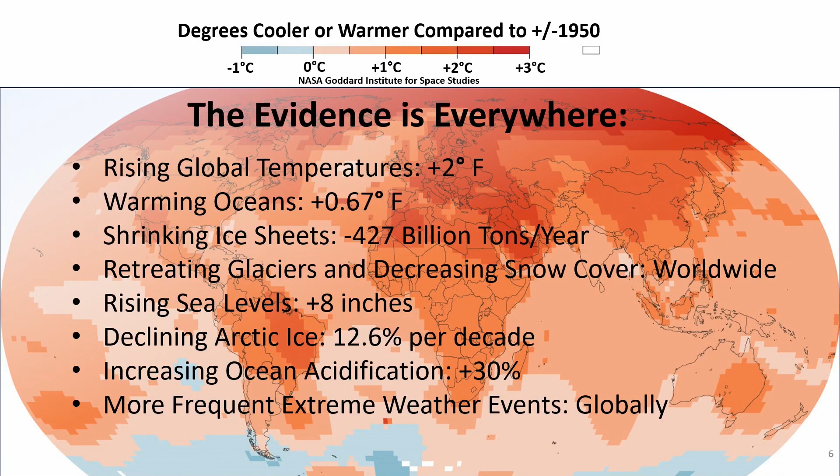So climate change really is slowly killing all life on the planet. It just keeps getting worse and worse. And evidence is really everywhere. You can read the list, and you've seen evidence of this before. Some people think it's just part of a natural cycle, but if you look at CO2 emissions through the history of time, it's exponentially increasing to a level we've never, ever been able to even not only not document, but conceive of ever happening. So, as I said before, we're both the answer and the problem.

But there is a solution. It is, at least to part of it, sustainable buildings. And there's some global plans on how we can get climate change to be reversed. But a lot of us don't really understand what to do about it. And hopefully that's where I can help. So, as Diane said, I've got a whole bunch of years of experience, and it all comes with time, and luckily without too many errors.

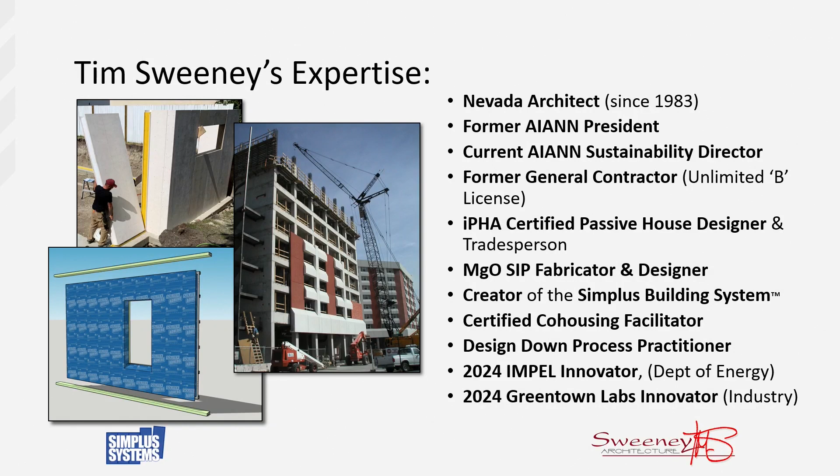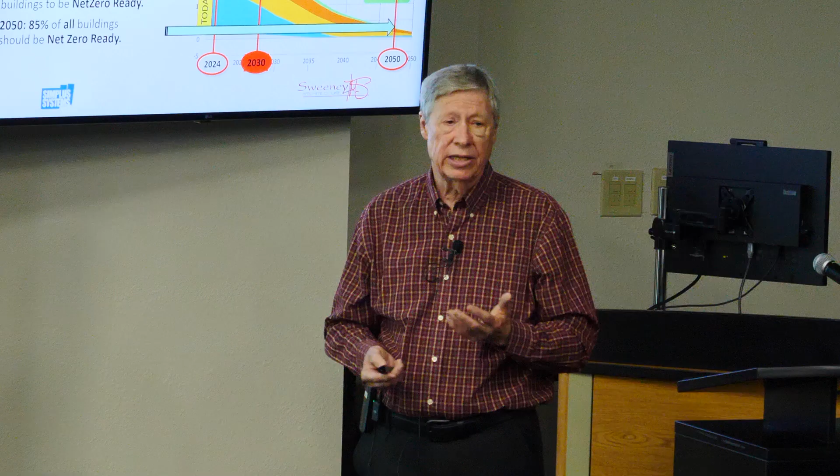But we're not going to make this deadline, and hopefully we will get it down with enough understanding and effort by everybody who's involved.

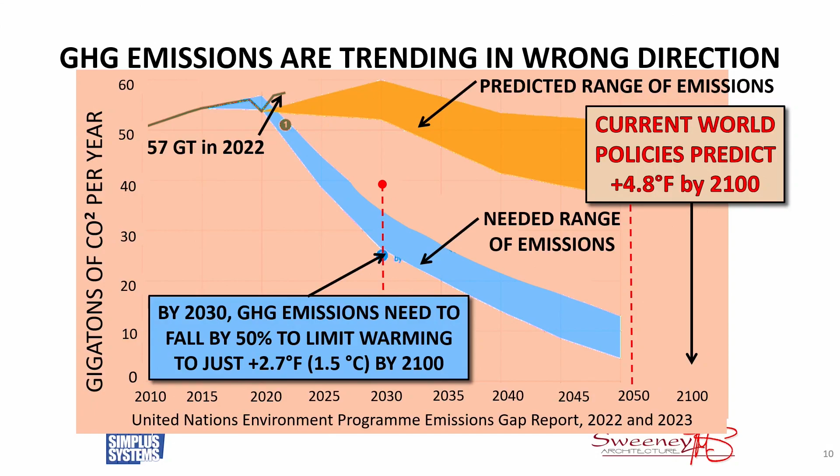To make matters worse, the population is increasing. It's astounding to me how much growth is going to be happening, an equivalence of entire New York City every 34 days for the next 40 years. That's just bizarre, but that is what's happening around the world. And it needs to be done sustainably, of course. We've got to stop this greenhouse gas problem.

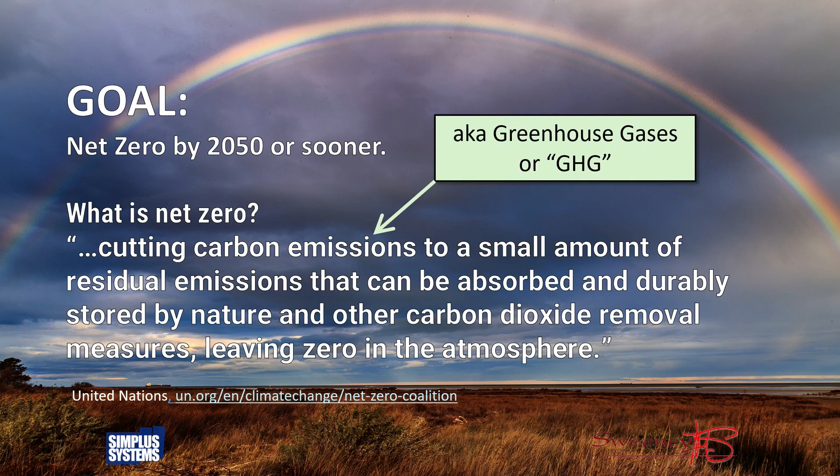So net zero, what does it mean? Well, it's basically cutting carbon emissions, which is caused by burning of fossil fuels, which is in essence greenhouse gases, cutting it down to a level where the planet can naturally absorb it and deal with it. So net zero just means getting to where we're sustainable. And we've got a long ways to go, unfortunately.

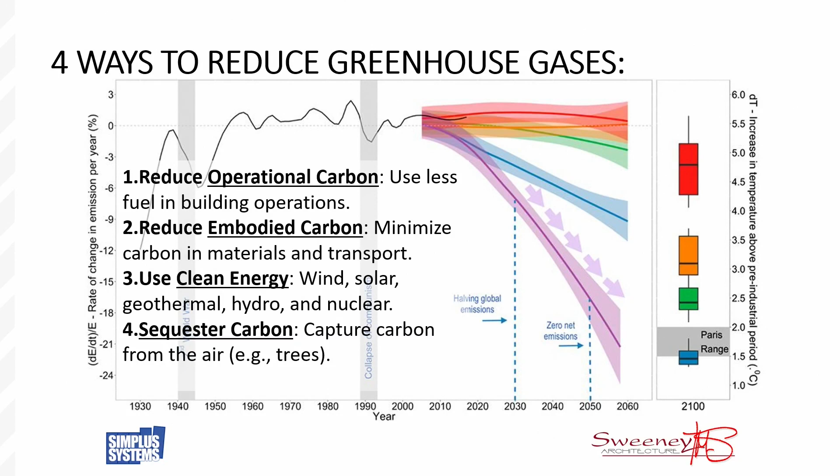But there's 4 major ways we can reduce the greenhouse gases. Operational carbon, the fuel we burn to heat and cool and run and power and light our buildings. We can cut down on that. We can reduce the embodied carbon, that fuel that's used to make buildings and make the materials and to transport the materials to the job site. Definitely there's some good movement towards clean energy and solar and such. And sequestering, capturing the carbon that's already out there and that is being produced, that's a good reason not to cut down trees and make lumber. So there are ways to redo it.

And the problem is that 39% of all the greenhouse gases are by building operations and building construction.

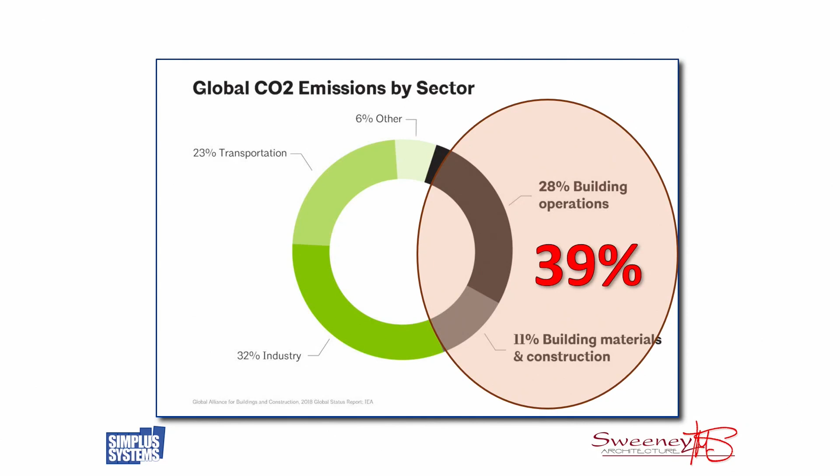Meanwhile, the codes are not adequate. They don't really get buildings built that are of a nature that limits fuel usage, both from construction and from operation.

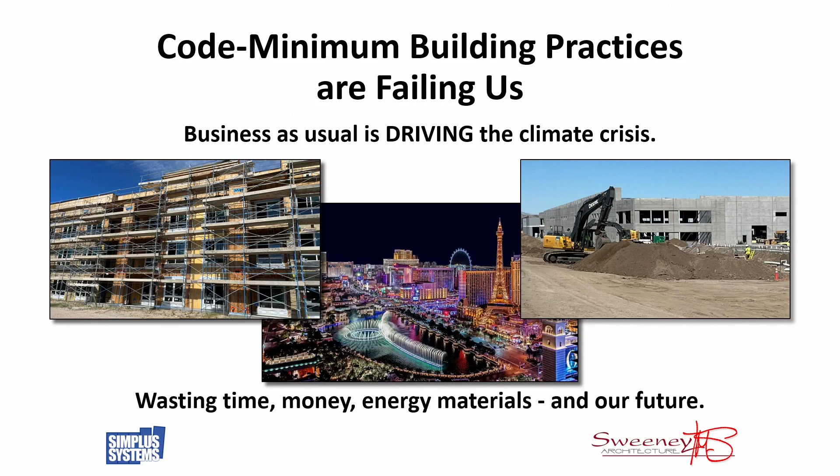These are a couple of projects that have been completed recently in the Reno area. Tilt-up buildings use a lot of energy just to make concrete and steel. Wood without a lot of insulation is a problem. And of course, any casino down in Las Vegas is going to burn as much energy as they can to get in the paying customer.

So we've got to stop all of this waste. Now, if we didn't have leaky buildings, that would be half of the battle right there. But buildings do leak—they leak air, they leak energy. It's likely because they don't have air barriers adequate to stop moisture and air from migrating, and they don't have enough insulation to keep us from having to burn more fuel.

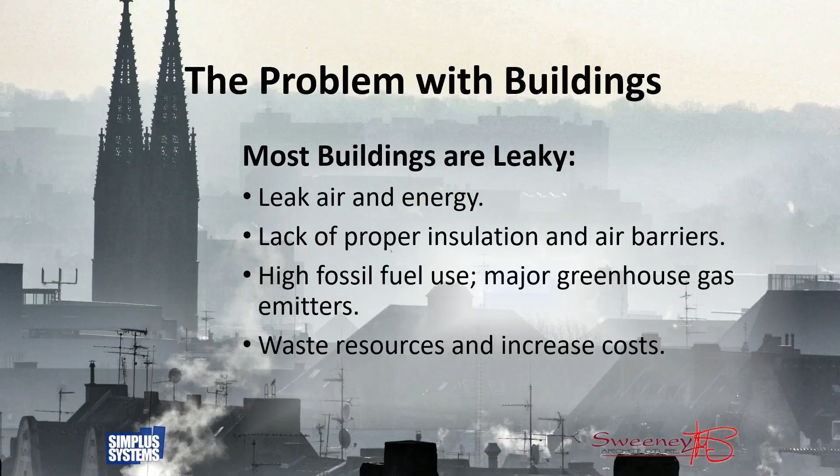As an example, one electrical outlet on an exterior wall can leak up to 55 gallons of water vapor per heating season—just one outlet.

Now, if that moisture—and in Nevada it's dry outside typically and more humid inside—if that pressure drive causes that moisture to get to a point where it can't evaporate, if the building's not leaky, well then that moisture can collect and cause condensation, mold, deterioration, a lot of repair work expenses, and health problems. So you need to have an air barrier basically on the inside of the building to stop that moisture from getting out.

But then there's more to it that I'll explain about ventilation.

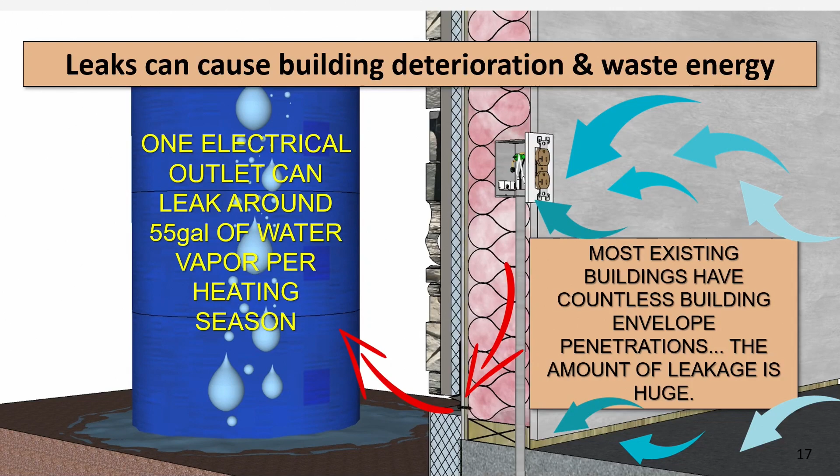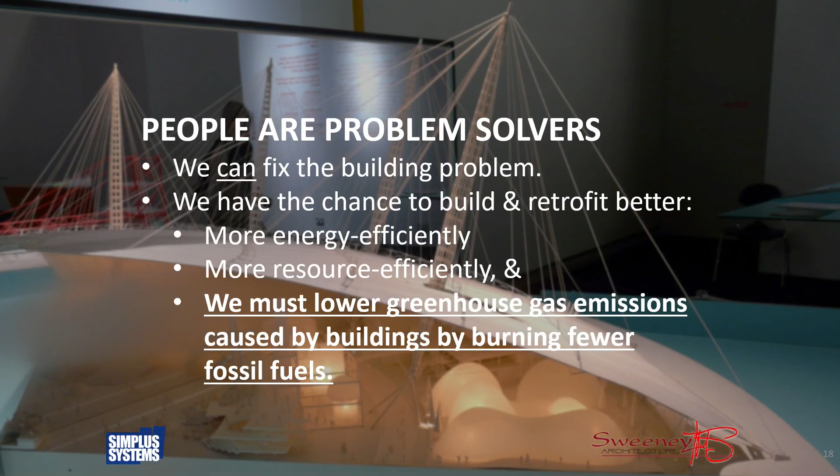Thankfully, people are problem solvers. We've had a lot of problems we've all had to face, and we're pretty good at rising to the challenge, especially when it's our own dollars, our own lives, and our own futures at stake. So we can tackle this problem if we really put our minds to it. But it's all, again, about lowering the amount of fossil fuels that we burn.

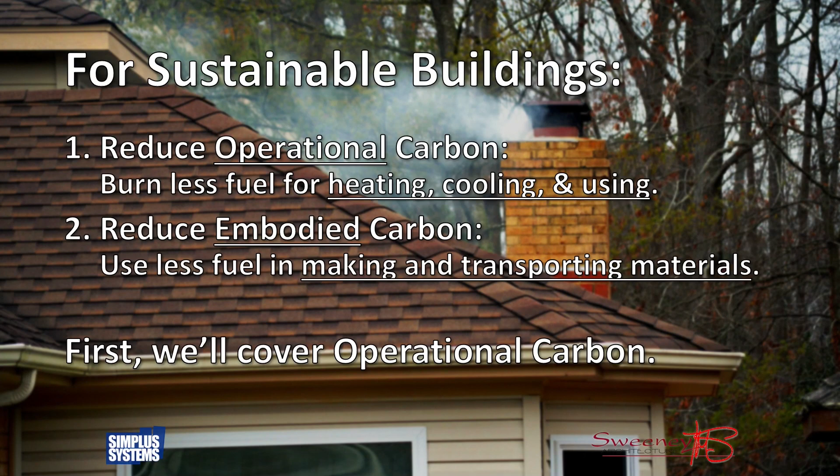So let's talk about how buildings can be made better. Basically it's two ways: reducing the operational carbon—burning less fuel operating them—and reducing the embodied carbon—using less fuel making and transporting the materials. We'll start with the operational carbon first. Remember these numbers, 1 and 2, because that's really the basis of everything.

So the best way to make the most energy efficient buildings is with a way of designing called passive house design. I'll explain how that name is a little confusing. But basically, you have the best way of designing that we're going to be coupling with the best way of building. That's the 1-2 punch we're going to be talking about.

Passive house is a German word that means inactive, passive, and it also means building—so inactive building relating to the mechanical systems.

This coffee thermos is a perfect example of something that's passive. You build it once, it does its job, and you can keep using it over and over, as opposed to having to keep pouring more energy into something.

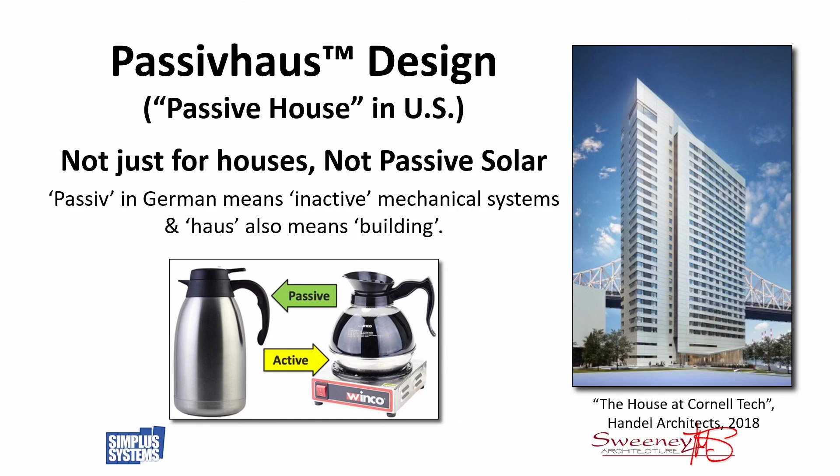This is actually a 26-story passive house dormitory that was completed in 2018. Not one of my projects—I wish it was—but it's an example showing you can do more than just houses.

Here's a little story about what passive house is: passive house explained in 90 seconds.

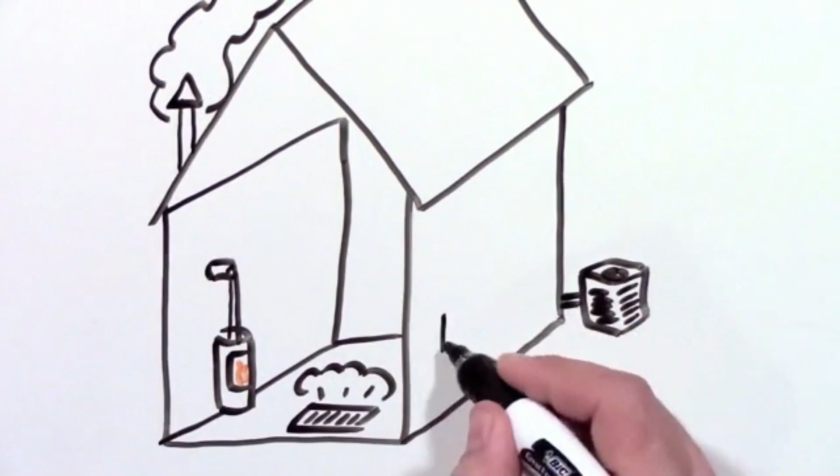Does your house have a heater in the basement, or maybe a fireplace? Probably also a central air conditioner, or maybe a window unit. Did you ever wonder if it was necessary? In 1991, a physicist in Germany, Dr. Feist, built the first passive house. Here's what he did.

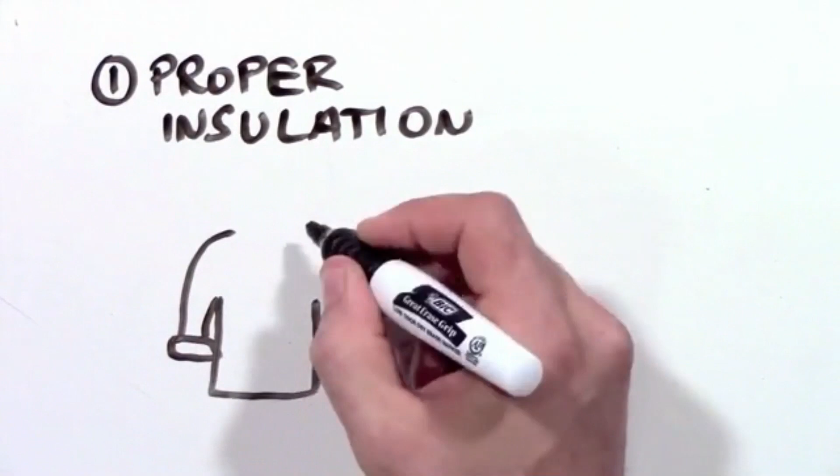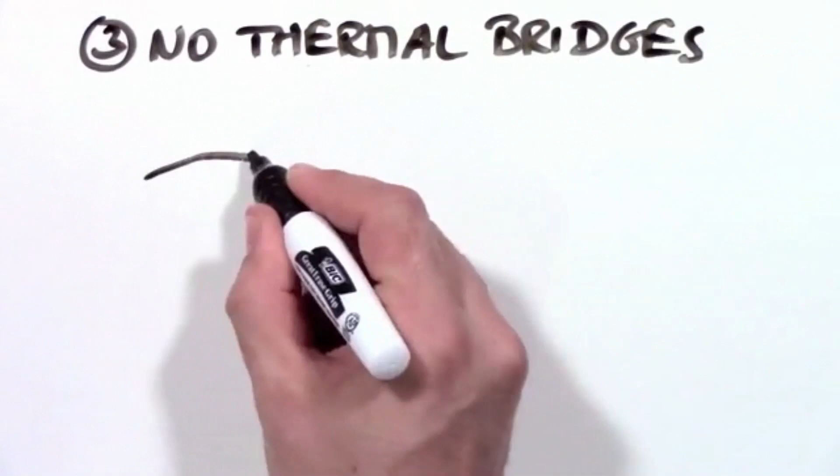One: proper insulation—it's just like wearing the right winter jacket, it also doesn't need a heater. Two: no air leakages—there should be no holes, small or large, to let hot air out of the house. Three: no thermal bridges—a thermal bridge is like a road for heating energy in which warmth can travel right through your walls. As a matter of fact, most of our houses have thermal highways in our walls where heat can easily travel to the outside.

Plus, the house needs proper windows, most of the time with triple pane glass. It needs to be oriented properly so the sun can heat it in the winter and shade is provided in the summer. And it uses an HRV, a device that provides the inside with fresh air without letting the heat out.

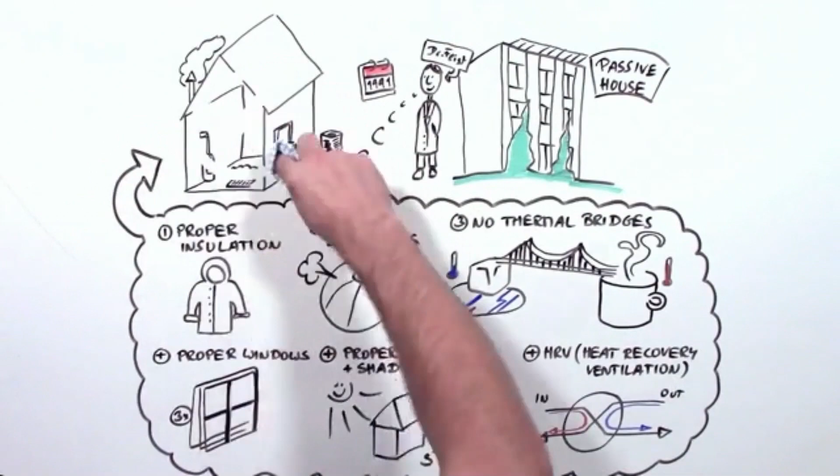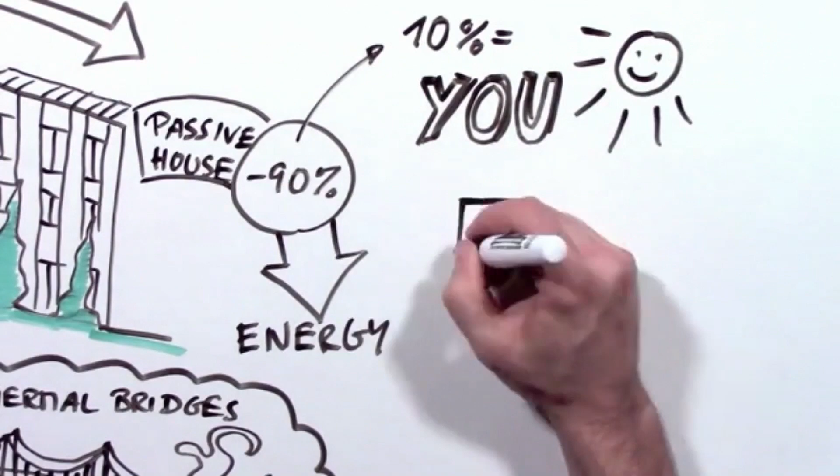Add all these things up, and it turns out your house doesn't need a heater or air conditioner. So where does the heat come from? A passive house needs 90% less energy, and that can easily be supplied by your body heat, the sun, your appliances, light bulbs, and even your TV. This saves you a lot of money on your heating bill and helps preserve the environment. Did we make it in 90 seconds? You bet we did. Very good.

So that talked about windows being triple pane. In this area, double pane is often adequate. And it's, as I said before, not just for houses.

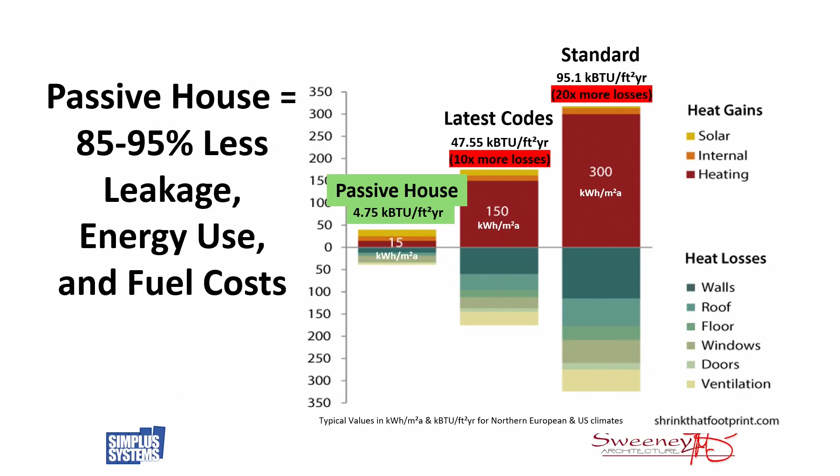To prove the energy savings, the column right here of energy used per year, 4.7 thousand BTUs per square foot per year, is really minor compared to the way that homes are being built nowadays, or even existing, with 20 times more energy consumed, or the latest codes with 10 times more energy. So you're looking at 85 to 95% less leakage, energy use, fuel costs, and pollution just by using proper design.

It also makes more comfortable, healthy, enjoyable spaces. Besides all the fuel savings, there's less maintenance and longer lasting materials. The more you go towards the right on this scale, the closer you get to net zero, to truly energy efficient building, and getting away from how we're building today. Greater energy savings, more comfort, healthier environment.

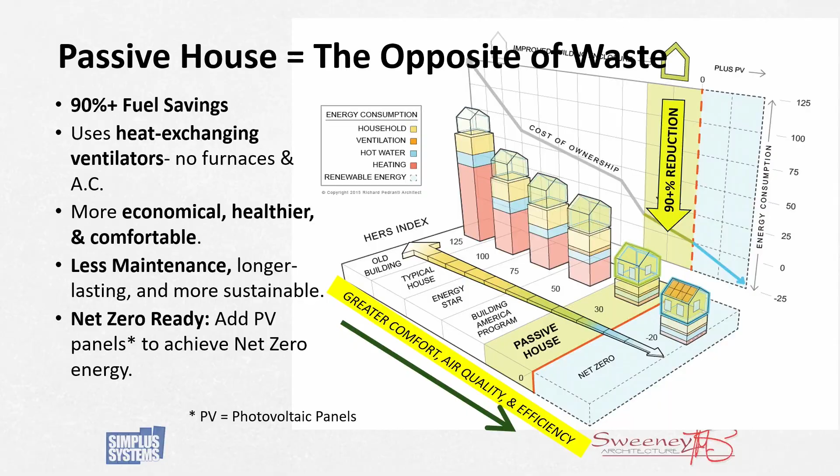Yeah, it's going to cost a little bit more, but without any other considerations, it's worth it, because you're going to get that money back plus, and there's ways to even save money with the construction systems I'll tell you about. So, reducing embodied carbon, the material or energy used to make materials, build buildings, and transport things.

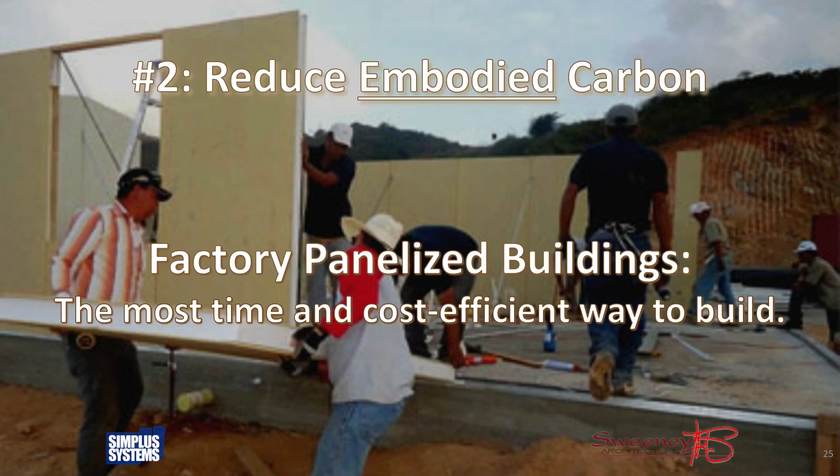RS Means is the US's largest, most well-respected estimating service. They publish estimating guides for contractors, architects, and engineers. They did a side-by-side test of a 2-story stick-built 2x6 home compared to an OSB, oriented strand board, panelized house, and found the panelized house was 55% faster to put up and took 41% less labor.

Now that all translates to cost, and it's easier with less callback if you're a contractor. That's very important.

There's lots of different ways of panelizing though, and I'm going to run through these so that you know your options and can make your own informed decisions. So we're talking about, first of all, what's called wood open wall.

It's basically stick framing done in the factory, making panels sized to fit onto trucks, then set into the field. You save a lot of time in the field on the framing, but you still have to insulate it, still have to sheetrock the inside, and it's still stick framing, still subject to fire, mold, and other problems.

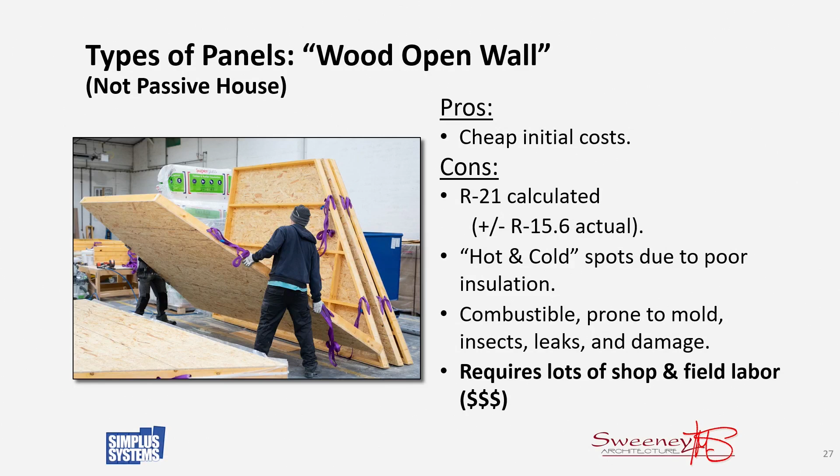Typically it's done with fiberglass insulation, which often sags and causes gaps in the insulation. Every time you have a wood stud, you have a thermal bridge, a place with lesser thermal resistance than the rest of the wall. So even though you may say it's an R21 wall, it actually often performs only R15, and you can have hot and cold spots. Basically, it's better than stick framing in the field, but it's still stick framing.

There's another version of panelized stick framing by the company Certainteed. They supply a lot of different building materials, and they have what they call their OPA, or One Precision Assemblies. That comes with the siding and the windows, and this one actually has insulation in place. They leave off the drywall so you can run the electrical and then put in the drywall inside, but it's still stick framing.

It still has the same problems that any wood project does, and there's a lot of shop labor that goes into it, so it's not an inexpensive solution, and the thermal resistance is really not all that great.

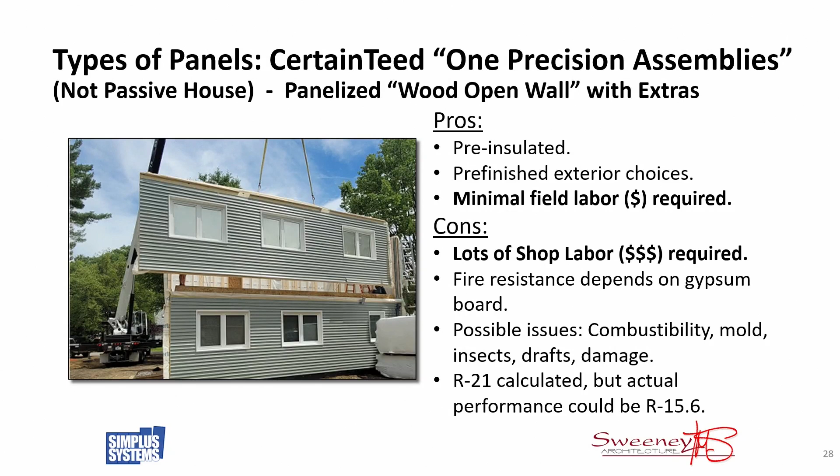Now here's where we start getting into true panels. This is the OSB panel I was talking about before, which RS Means used in their evaluation compared to stick framing. It's definitely a more energy efficient way of building, because there's basically uninterrupted insulation along the width of the panel, with just what are called splines, doubled up studs, happening every 4 feet on center.

So you save a whole lot of thermal bridges, and it's done in a factory, so there's little shop labor, and it goes up fast in the field, so there's little field labor, so you save a lot of money there. The cost is going to be more than stick framing on a material basis, but you save a whole lot in time and effort, and often it's actually less expensive than stick framing.

You do have to use drywall to finish off the inside of it because it is wood, unless you like the wood and you don't need a fire-rated interior, then you can live with OSB if you choose to.

The other kind of SIP, or structural insulated panel, is MgO. MgO is a chemical name for magnesium oxide. This is a sheet of it right here. It's just cement board, made from magnesite ore. The cement most people think of is Portland cement, which is made by burning limestone. So this is just a different kind of cement board.

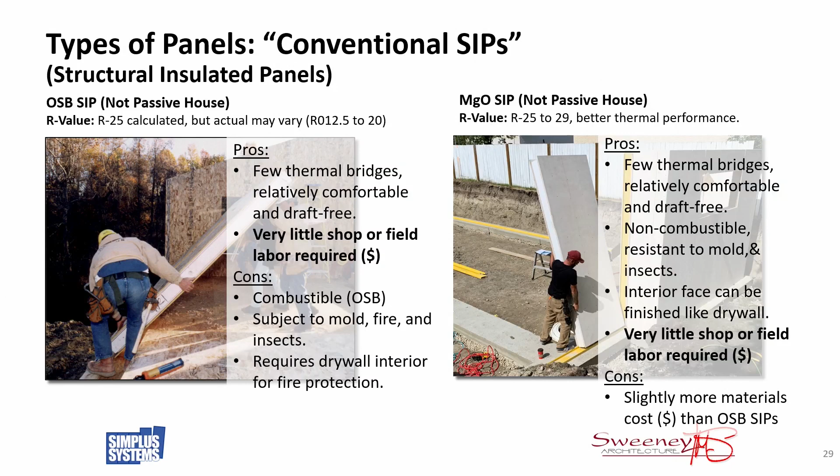It's so affordable that you can pay for those passive house increased costs and still end up with an overall less expensive building that is healthier, performs better, is more sustainable—exactly where we're trying to get to.

This is a little bit more information on structural insulated panels. You'll see it's a sandwich of insulation, often expanded polystyrene or styrofoam, and the cement boards, and then there's different kinds of splines that you can use.

Metal has been used quite a lot. I don't agree with that approach because it's a thermal bridge. That means you need to put additional insulation over the exterior to stop the temperature from reaching that metal.

Or you can use synthetics such as fiberglass. That's really the best way to go because the thermal expansion coefficient of fiberglass is the same as the MgO board. Or you can use wood.

You better use dry wood that doesn't shrink on you. Or you can use what are called block splines or surface splines, which are kind of like what they call biscuits in cabinet work. But again, MgO is non-combustible, antifungal, fire resistant, water resistant, non-toxic, and that's an example of what happens—it just gets a smudge.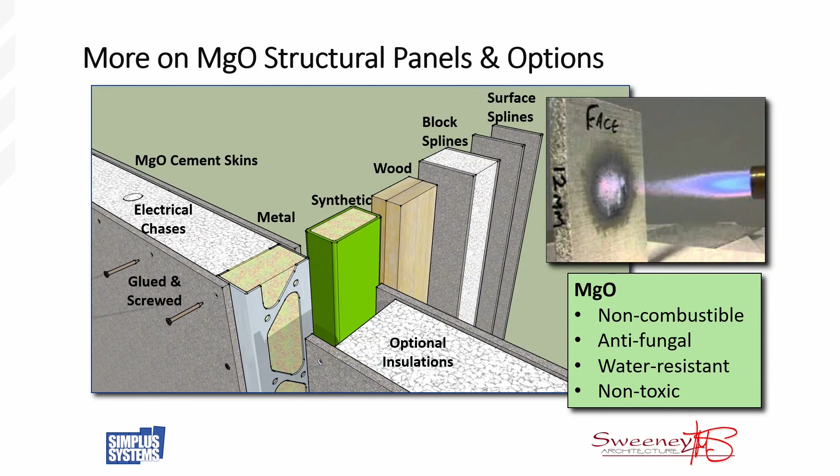This is a mini sample of that same kind of thing. It just has a skinnier piece of insulation in here to allow people to more easily handle it in demonstrations such as this.

And one of them in Florida even survived Hurricane Irma with just a couple of windows that blew out—they weren't fastened correctly. So even though other buildings in the area had lots of structural damage, the Florida building didn't.

And if you're doing what's called prevailing wage projects, that means you're required, for any project using government money on a government or funded project, to pay a minimum wage, which is often very equivalent to union wages.

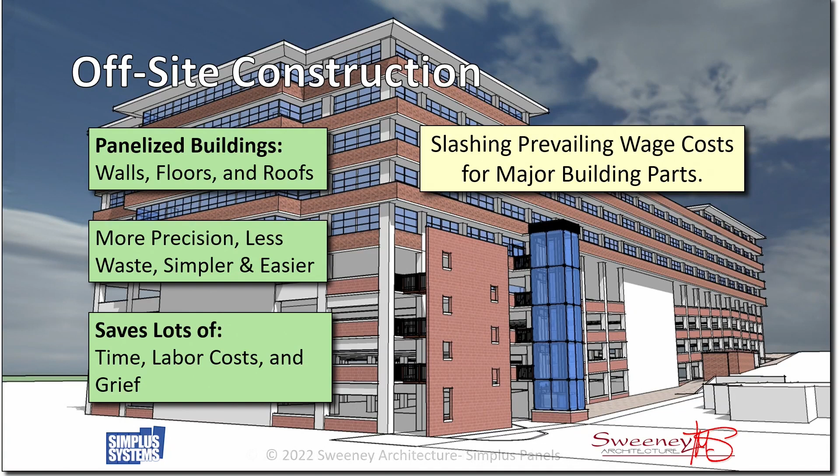Beyond the standard MGO panels, you add passive house features to them, and then you get the best of both worlds. There are two kinds of panels that you can use that have passive house features. There are others on the market, but these are the two that are more common.

One is basically a wood double wall system, and they have enough insulation, often mineral wool, or sometimes some organic insulations, enough to get the R value they need. They will also put on an interior air barrier and an exterior weather barrier.

That's a great way of doing it, but with the wood wall panels, you're combustible and you have a whole lot of shop labor because there's a lot of framing involved, and you have to add the drywall. So you end up with more embodied carbon, but it's still a good alternative compared to conventional construction.

Or you use the magnesium oxide SIPs. This happens to be the image of our Simplus System panel, and it comes in large units. Very similar to the wood system, except we're not using wood, we're using the MGO panels, with exterior weather barriers or interior air barriers. It's like Legos for adults—just set it down, glue it and screw it, and do the next one.

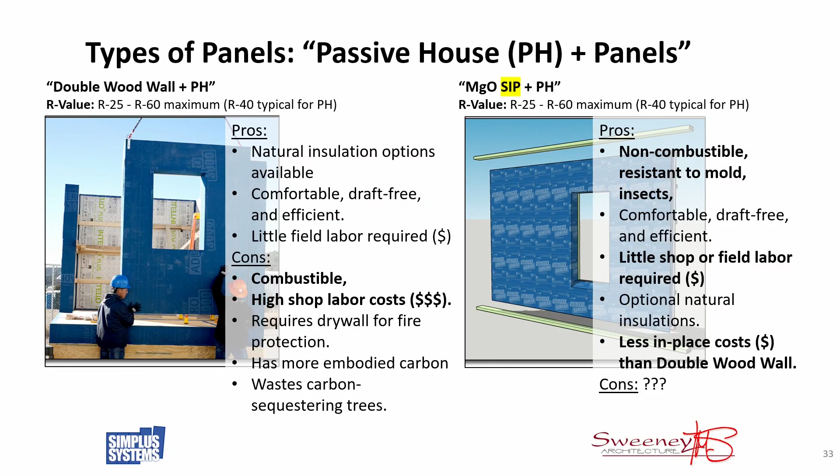When you think about all the different building systems available, the common standard everybody uses is wood framing. If you think about what's the most energy efficient versus the least, and the slowest versus the fastest relative to wood framing, all these other systems may be a little faster or slower, but they're all definitely less energy efficient.

Where if you get up into this corner, you have really 55% faster than wood and 85 to 95% more energy efficient. The double wood wall panel will be in the same energy efficient range, and it'll be just as fast in the field, but it will end up costing you a little bit more.

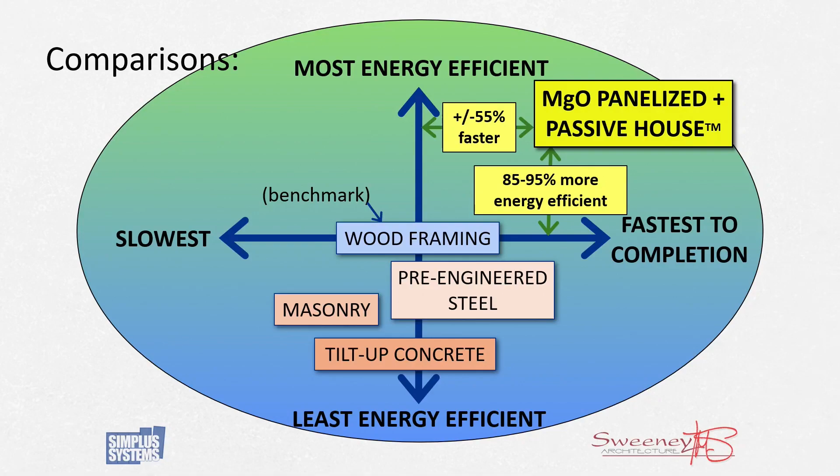When it comes to embodied carbon and R values, this is really where the important things are happening. This is the amount of kilograms of CO2 embodied in a standard wood wall, 17.4 kilograms, versus the Simplus system.

Again, this is not a sales job, but I want you to know what's available, and other people who make this kind of system. Unfortunately, there is nobody else because I invented it. But we have less than half of that embodied carbon, which has been proven by analysis using a software called PHRibbon, and we're double the R value of the standard wood wall.

So you put together magnesium oxide-based SIPs with Passive House and our own secret sauce, and we really believe it's the most efficient way to build.

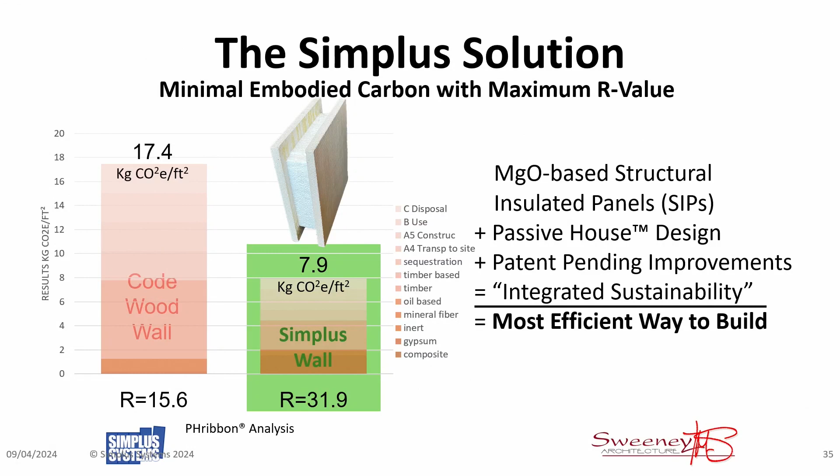This is more of the same: roof panels sitting on wall panels sitting on floor panels, all done with the same Passive House and magnesium oxide approach.

That results in 20% less framing costs. It depends upon how much of your building is going to be built with panels as to how much money you can save by using these kinds of systems.

We're about ready to go to a building department on a Virginia City Highlands home, and we're using panels for the roof, interior walls, exterior walls, and floor systems, two stories. Foundation is the only thing that's not panels—it could be, but we're dealing with rock situations, so it's best to use concrete. The bottom line is that one is coming in at 20% less construction cost than stick framing.

For example, if you have a $12 million project, you can save somewhere around 1.33 million. That's 10,000 square feet of additional free energy efficient space that's available and can be put to whatever use you have, whether it's housing or any other kind of building.

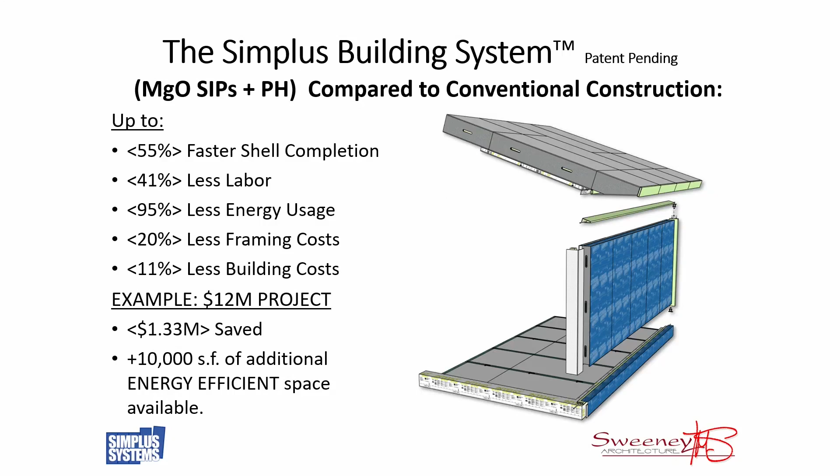Dollar per R value is what it all boils down to: 64 cents a square foot of wall area for our system versus a code wall versus a double wall.

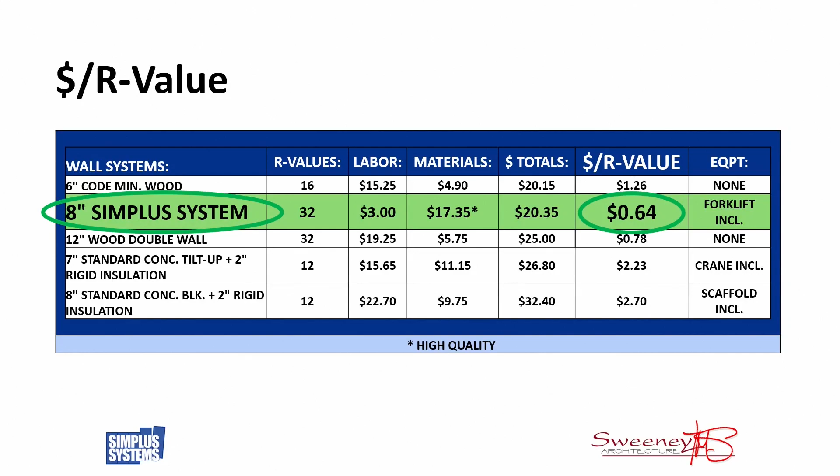Here's standard tilt-up concrete and concrete block. Trouble with concrete and block is typically they only put 2 inches of rigid insulation in them, and you need scaffolding, cranes, and more equipment to get those things built—often heavier foundations, more earthwork, more reinforcing, more concrete. This is a light system and you can avoid a lot of those problems.

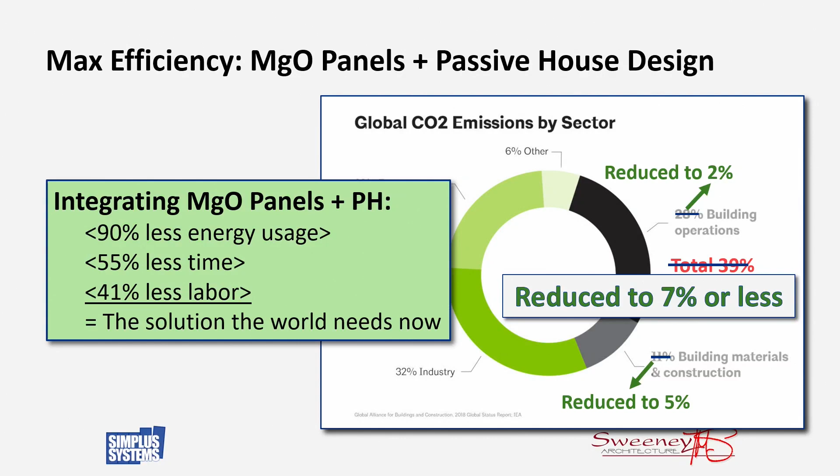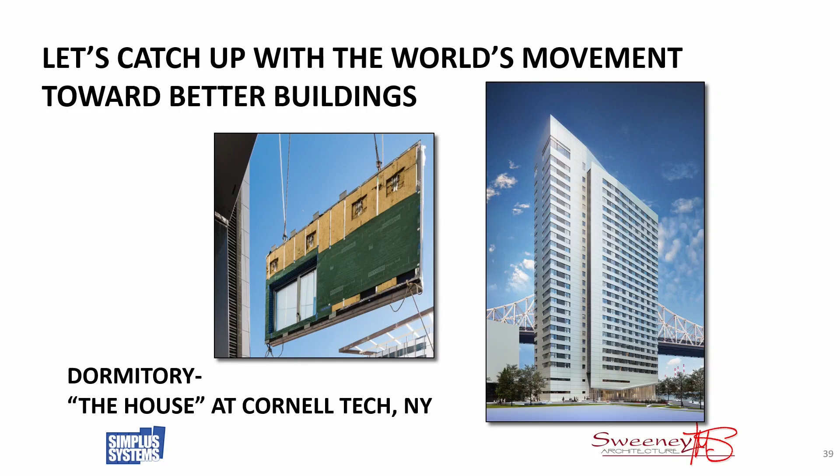So let's see what the rest of the world is doing, especially regarding passive house design. I showed you this dormitory, 26 stories. Well, yes, it is panelized also. I bet they use metal studs in here, but I would also bet that they have a lot of insulation on the outside to compensate for that. So dormitories are definitely easy to do.

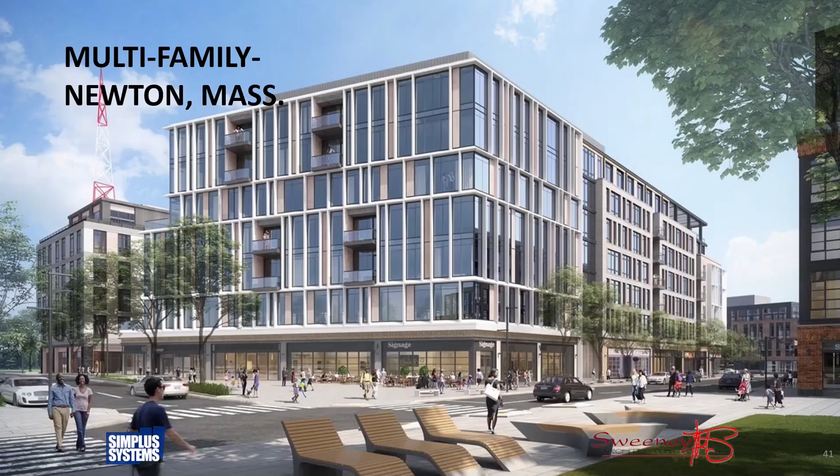This is a multi-family high-rise building that's about ready to start construction in Newton, Massachusetts, all passive house. Whether it's panelized, I don't know. Multi-family, in fact, it actually has commercial on the bottom, so it's called mixed use. Office buildings, the fact that they can get by with all that glass means there's a whole lot of insulation someplace.

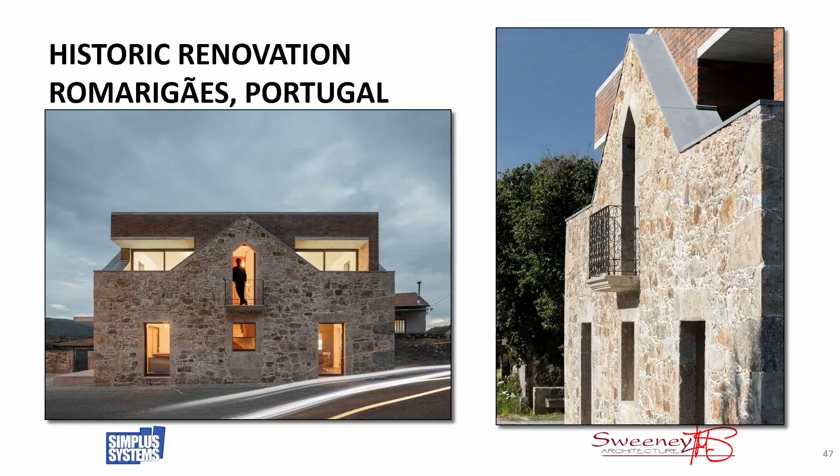Affordable housing, elementary schools, colleges, resorts, historic renovations, historic or even non-historic renovations. You can retrofit the interior with the same kind of passive house approaches. They're not as effective, but they do work, and you will definitely reduce the amount of energy usage.

The trick, of course, is when are you going to have the money to be able to put into place those changes? And that's why things are probably not going to happen on that International Energy Agency timeline.

There are new building codes out there that are available to use. They haven't been adopted. I understand that the City of Reno and Washoe County are looking at their planning and regulations and their codes. Hopefully they're taking a look at this. I would expect so.

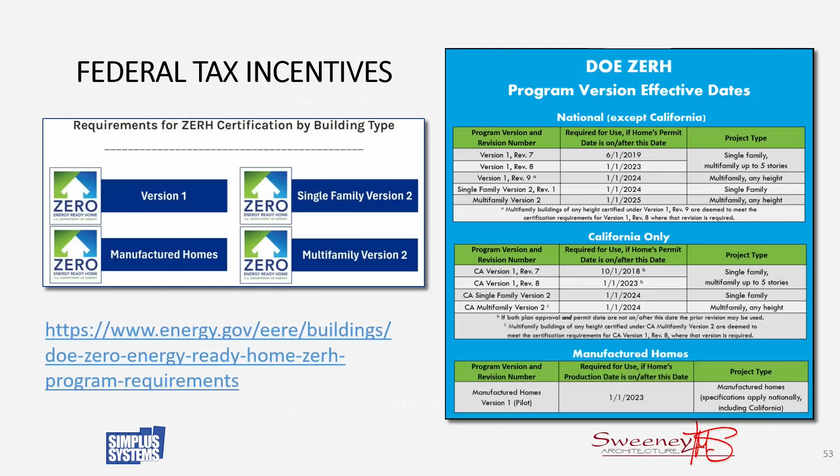Okay, federal. So we're getting to the bottom lines. My personal recommendation is, yes, let's get the codes going to where they need to be. Let's limit greenhouse gases. Let's promote better living and working environments for health and sustainability. Let's get some strong tax and rebate incentives going. Well, there's your political football. We're going to have both sides debating who's going to be able to do it and who's not going to be able to do it, unfortunately.

It'd be wonderful if we could reward carbon reduction practices with tax and other rebates, and if we could actually penalize people who are not carrying their share of the load. So we all need to be responsible. If we're going to be building, if we're going to be retrofitting, we need to do it the right way. That goes for owners and developers, all professionals, code people, everybody. We need to be the adults in the room.

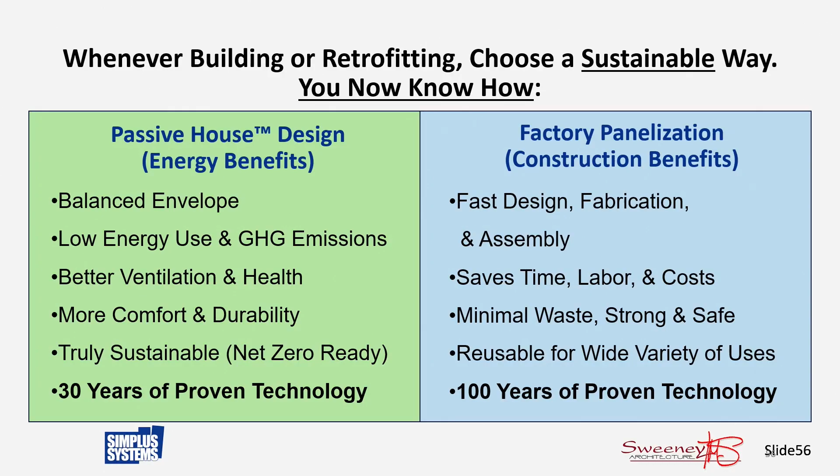So now you know ways to build more efficiently. You know how to do it with passive house design. You know how to do it with factory panelized buildings. All these benefits come at about the same cost as for what we're paying for construction right now. So why would we not do it this way? Well, everybody's used to doing things the way that they always have, and everybody's in their boxes, and it's like trying to steer the proverbial battleship. You know, it takes a long time, but we don't have a long time.

So before it's too late, do what you can do. Let's take action. As I said before, our futures depend upon it, and especially our children and our children's children's futures. And it's up to you. I'm trying to do what I can do, but I'm just one person, so please do what everybody can do here.

Now, I want to mention TMCC has a great architectural program. They are moving towards accreditation of their entire program, and they're really going to be the first architectural program ever, I think Daisy can maybe clarify, done at a college, a community college level. That is correct. We have currently run the program.

This year, we have for the first time the fifth-year students from the program, so we're very proud of them. Our main objective here is providing quality education to our community here in Reno, Nevada, and accessible economically for anybody who would be interested in architecture.

So this is a work in progress, we're currently working towards accreditation, as Steve was saying. And we enjoy you guys being aware of our program and sharing the word out there. The bottom line is it's definitely going the right direction, and everybody needs to support it because they know what they're doing. There's information over here on the table, both for the TMCC program and for myself.

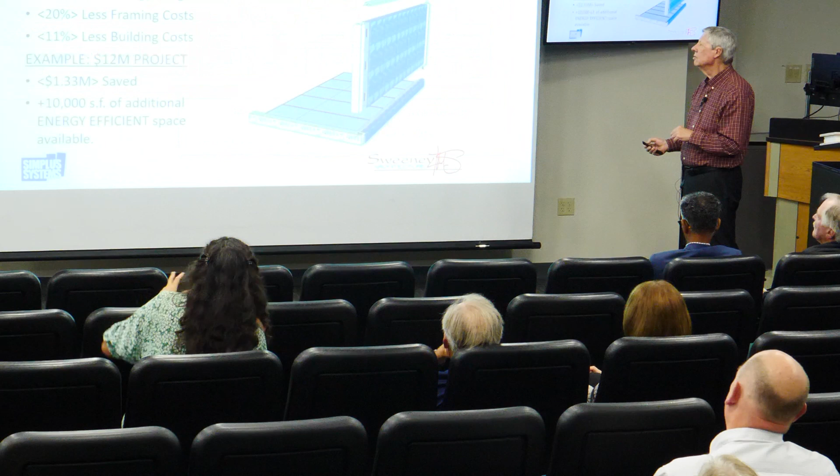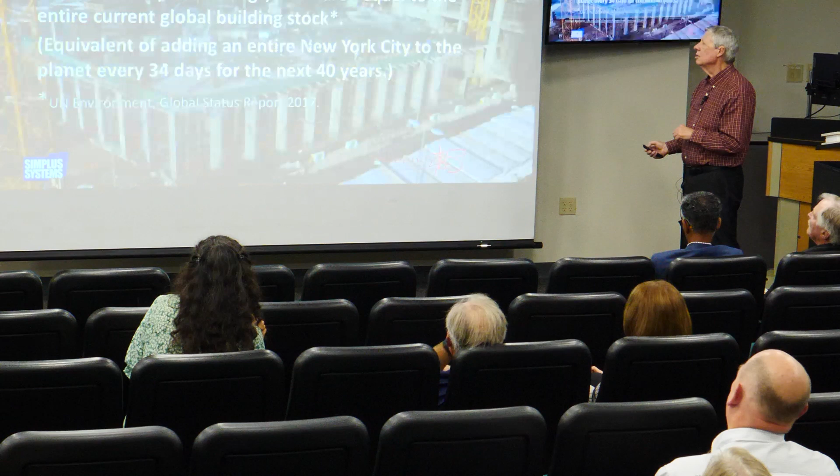Yeah, it's complicated, so... here, there it is. All new buildings must be net zero ready by 2030, but then by 2050, 20 years after, 100% of all buildings - instead of all new buildings. That was the missing piece. That's the distinction - all buildings, new and existing. I didn't memorize it properly. And that's out here at the 2050, but we're trying to at least get some of them done by 2030, and it remains to be seen what'll happen.

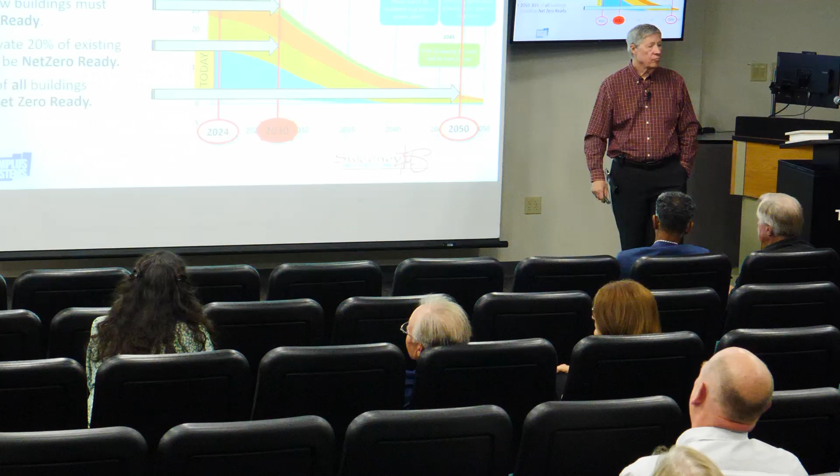Yeah, but good point. Gosh, this has been wonderful, Tim. Thank you. I imagine everybody joins me in being so happy to learn a little bit about what you're doing.